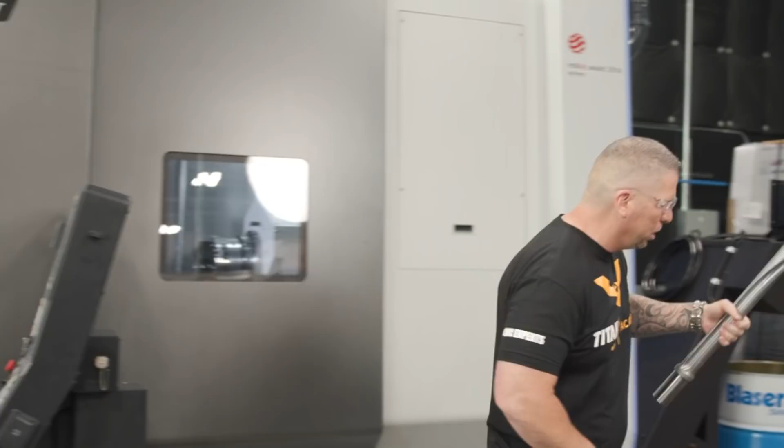And now we're on the big SMX 3100 doing some 5-axis work, cutting some fins into this amazing part. And what is that? Is that the TE? Yeah, Harvey 1 TE. Awesome. So that's a Harvey 1 TE going right through there, big cuts. You can see how it's changing angles. I mean, just the beauty of this machine right there, using all the axes just moving, getting after it, big cuts. Mm-hmm.

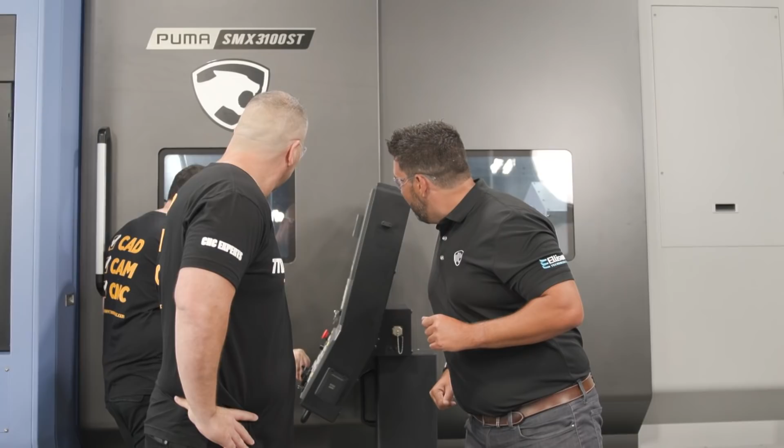So when we were talking earlier, we talked about the machine, we talked about the 9-axis and what it can do, but I think a lot of people wonder, why would I want to buy this machine? I could go buy a 3-axis mill, I could buy a 2-axis lathe for less money. Why would I buy this machine? And more drama. Nice, nice. Look at that cut. Love it. So why would we buy this machine?

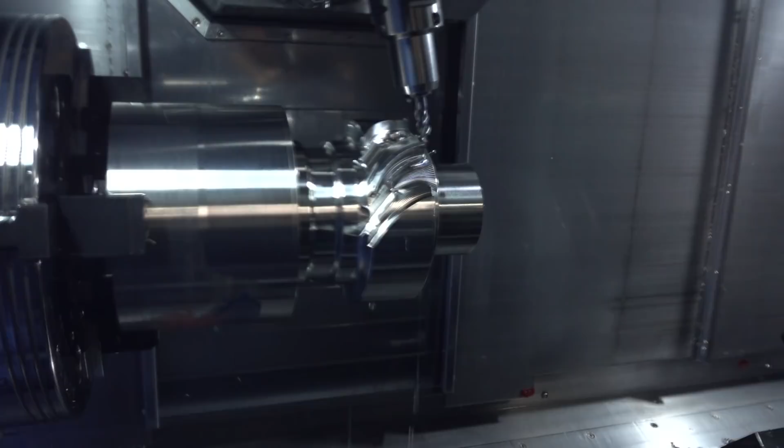And it all comes down, and you talked about it, to making more money. How can we become more efficient with our process? Yep. And right now, in the shops out there, your biggest asset is your labor. Yep. But also your biggest challenge, finding good guys, is also labor.

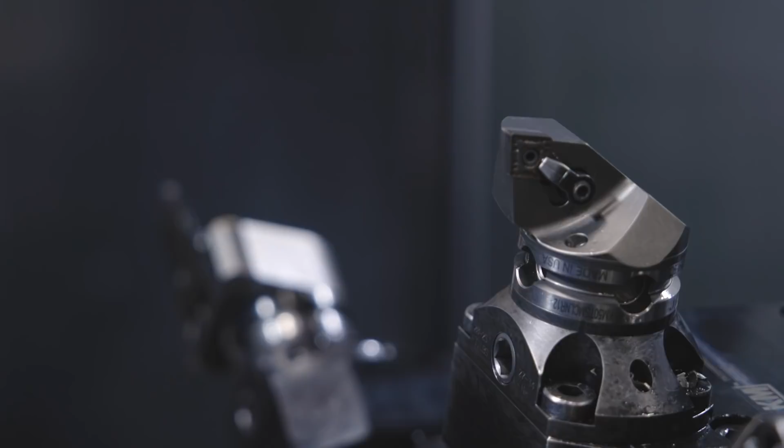So the good guys or girls that you have in the shop running the machines, you want them to maximize their time and be as efficient and productive and as value add as possible. By combining operations, you can remove all of that setup, all that non-value add, and put it all into the machine so that when your spindle's cutting, you're making money. Absolutely. And what do I mean by that?

So for example, if you've got a lathe and you're gonna make this part on the lathe, you've got to come in, you've got to turn it, we're gonna drill it. Maybe we use some live tools for it. But let's say you're a job shop and the next day you have a different part to make. And then you're like, oh man, I need another one of those angled live tool holders. Well, that's another 4 or 5 grand, 6 grand, whatever I'm gonna spend on that. And then you got another part and you need 2 more of those angled live tool holders. And then you run out of turret positions and you got to tear down your whole setup.

But a machine like this one, the multi-process, in that upper head, because you've got a tool changer, if you want to go from a 1/2 inch drill to a 3/8 drill to a 5/16, whatever you want to do, all you're doing is a tool change. Yep. Same thing with your turning tools as well.

You can keep our big monster tools, our big drills, dedicated down the bottom, but we could use that tool changer in combination with that true milling head, which is gonna allow you as a shop owner to basically save money, and you're gonna make more parts and make more money and become more efficient, and you're gonna be able to feed your families better and go on cool vacations and everything else that goes along with that.

Absolutely, man. And you ran a shop, you owned a shop, you know that challenge of setup, and every time you move a part from one machine to another, you may scrap it. But it all comes down to the parts. And that's why this platform is so well designed for job shop type environments where one day you get a PO for this part, next day you've got to change it over, you've got to make something else, you need to be up and running as quick as possible. That's where this type of platform is really going to take advantage.

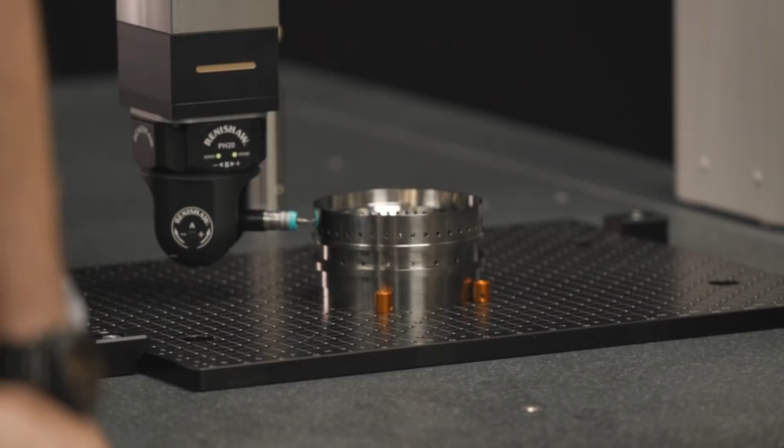And so exactly, it's like 7.5 degrees, 15 degrees, 22.5 degrees. That's right. Those are the degrees that you're locked into, and you can't check anything really efficiently if it's not on that angle. Correct? Yeah, exactly. Like we have 40 holes here at varying angles, 9-degree separation. With the old probe head, you couldn't get all those holes without running at least 2 or 3 times the program to get everything. So it helps us really be a more efficient programmer. Exactly. Right? Gotcha.

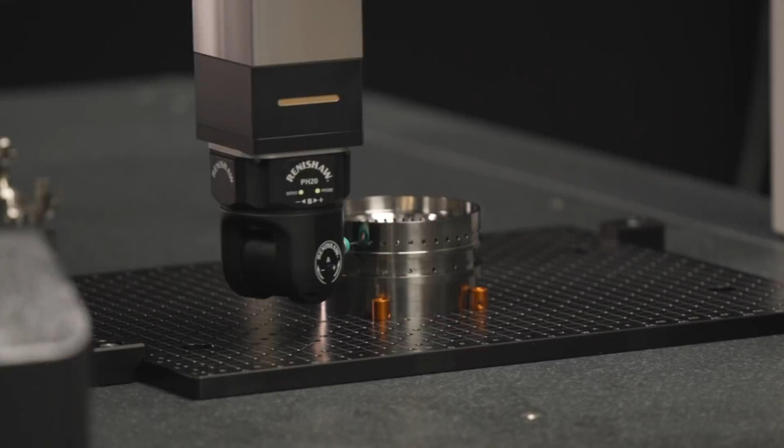So now one of the things with that, we have full 5-axis head movement, right? We got infinite angles, or less than a degree, approaching infinite, right? So what does that give us as a benefit with respect to this space right here that we're checking parts? That allows us to optimize the space of the CMM, getting around the part a lot more smoothly compared to the old CMM, where it comes out and then goes back in.

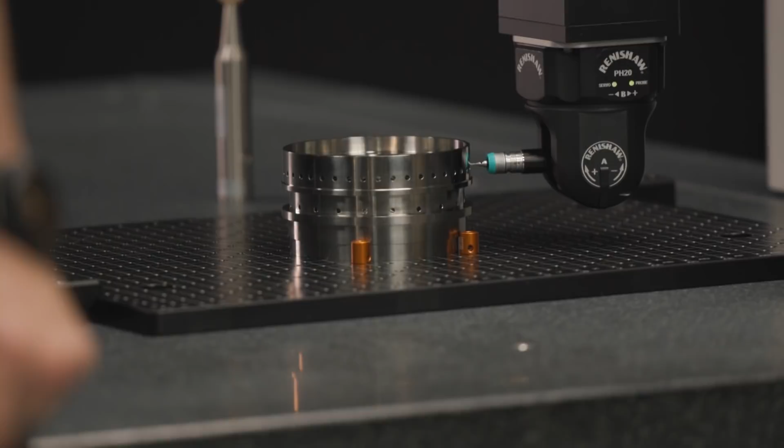Well, and one thing they were talking about there at the SMX that I like, they talk about not having to break down setups, right? Having the ability to kind of multitask. So with this, we might be able to maybe sneak another part in there, multiple setups. You see how long the space is on the CMM, so we're able to run another part in the back there, or maybe even side by side, giving enough space for the probe head. Oh, there's a nice little 5-axis move for the end.

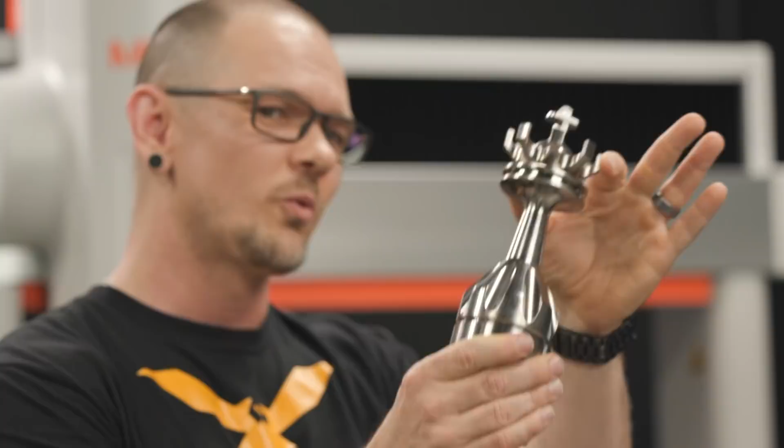All right, so we have one more part to show off the dance moves of our head here, right? That's right. Okay. Some of you guys might recognize this part right here. This is our Titanium King XL. And actually, if you go to the Academy, we have a video with Tyson showing you guys how to machine this part right here. Now, we're gonna do a little inspection on it. That's right. Thank you very much, sir.

All right. And right now it's just switching probe tips so that it allows for a longer stylus to get into some of these tricky angles here. Yeah, and I like that. I don't know if you guys can see, but we have a 6-station probe change rack right here. It has six different modules there. We have a standard force, medium force, an EM1 and EM2, a light force, and a 6-way. So definitely a lot of options to tackle the different nuances that you might run into in an inspection environment. Very nice. So you ready? Yes, we're ready, let's do it. Let's go.

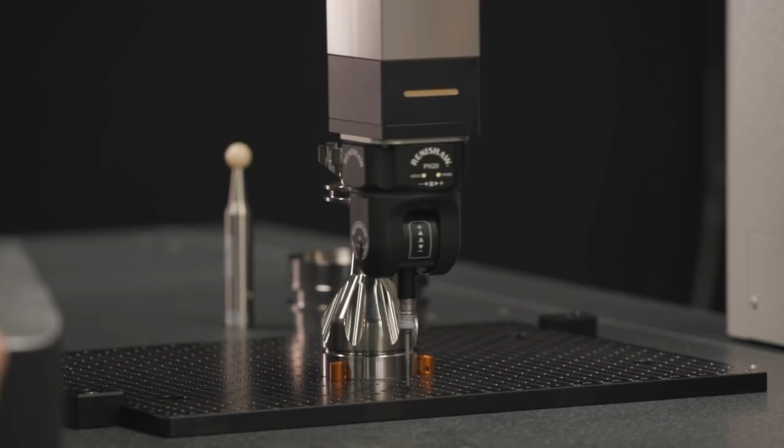All right, I've seen that several times, and it still gives me a little bit of a heart attack seeing it rush towards that probe rack. So we have rapid speed on this, roughly? Yes, roughly about 600 millimeters. Gotcha. And so again, another little alignment. Little nice rotation right here.

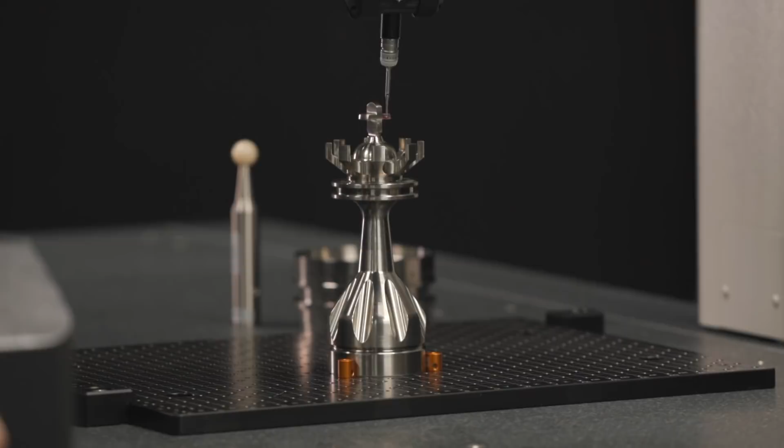Now this is what I kind of like about this. We're not really using the machine movement, we're using head touch, right? You want to tell us a little bit about that? Yeah, the head touch allows it to just move the probe head without moving the big machine, all of the mass of it at least. And that allows for a faster inspection time, a faster calibration time. Basically, we don't have to brake, we don't have to accelerate this big machine, we don't have to slow down this big machine. And you can see that with the moves going around very close to the part, optimizing the movements and also optimizing the program timing too.

So we talk about optimizing the programming time. If we're good programmers, looking at you guys, what kind of savings can we expect to see? You can look at about 40 to 65%. 65%. No excuses. No excuses.

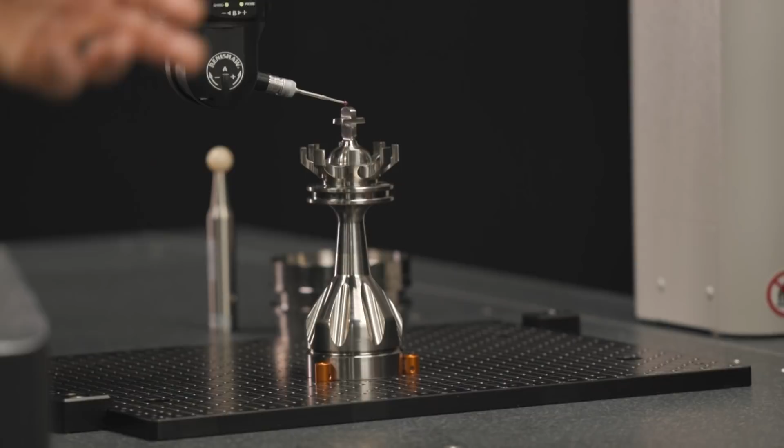All right, so here we go. Looks like we're checking the cone. That's right. I love that motion, I really do. So then we got the head touch coming around the top again. So let's see what else. Accuracy and repeatability, right?

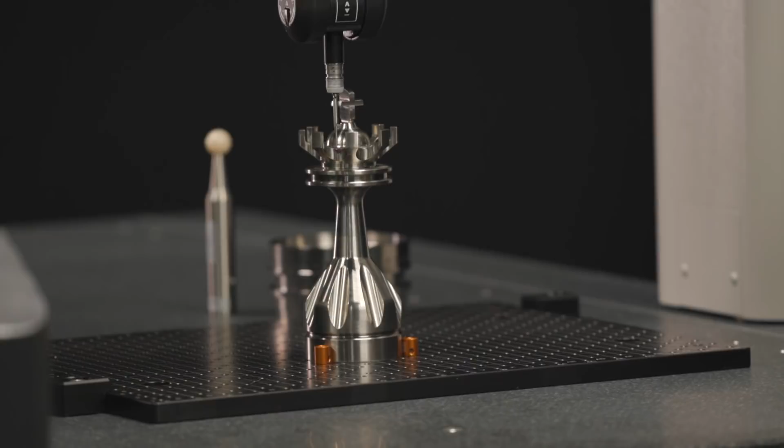It's nice to be efficient, but if we're not accurate, what are we really doing? So what are we talking about? Accuracy, repeatability. You're looking at about 2.2 microns on there, about 1/10 of a thou for you inch guys. I'm one too. And when you increase the length, of course, you lose a little bit of accuracy, but we're still looking at about under 3 microns here. Okay, very nice. I love that.

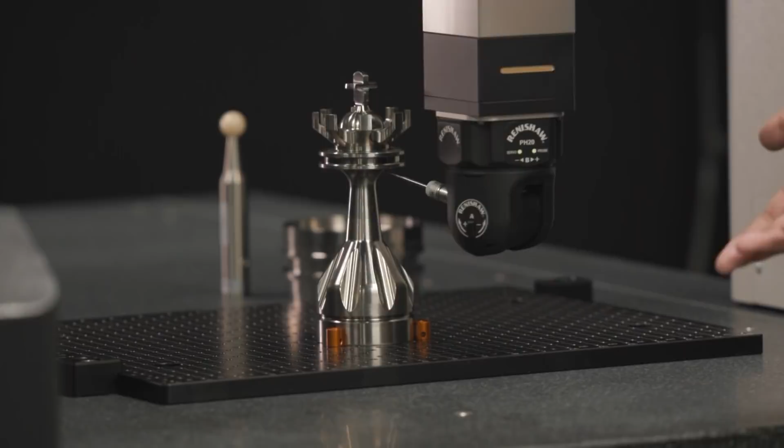Yeah, it does that whole rotation. That's that A-axis tilt that you were talking about, right? Yep, coming underneath. And the max on this, instead of the other probe head, is 115 degrees. And you're able to get nice movements like that. Nice little bow at the end, right there. So that wraps up our small demonstration of the Crysta-Apex.

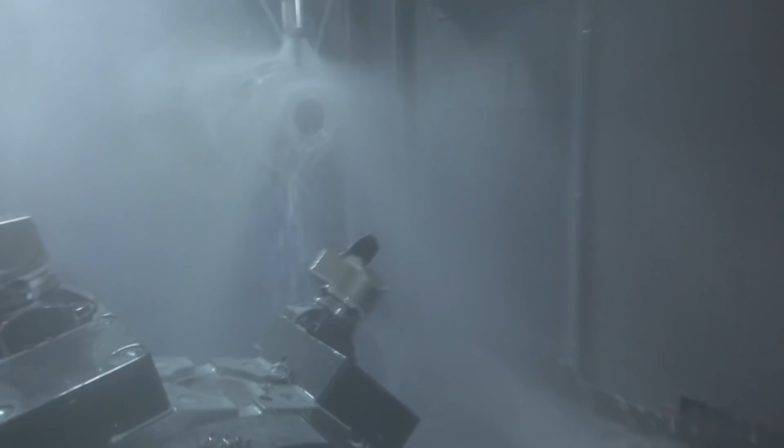At this time, I want to bring in Dylan, and he is from Mastercam. You guys know Dylan from the last Boombastic. Hey, what's going on, brother? Good to be back. How are you? Good, thanks. Awesome, awesome.

So we got everybody out here, and let's just have a talk a little bit about toolpaths. You can have all the material, you can have the CAD, but it's all about the CAM and programming those toolpaths so you can actually take advantage of a 9-axis machine. And Mastercam, you guys got some trick toolpaths. Yeah, obviously we got a complex machine here. We got a complex part.

We got intimidating tooling. I don't know where that drill went, but it's being passed around like it was Excalibur here. So how are we gonna program all that easily, efficiently, and safely? That's going to be done in the Mastercam Mill-Turn module. That's what we're going to use for these kinds of multitasking machines to lay out our programs in an easy and efficient manner. So that combines a lot of different parts into one module to enable things like that.

We've got a lot of specialized tool paths for something like a mill turn machine. And then combined with that, we've got the complexity of the machine where we've got different streams. We've got a lower turret, we've got an upper head. They're all moving around simultaneously. If you're doing something like actually bar feeding, you've got the lower turret working on one half, maybe the sub, you've got the upper head working on the other side.

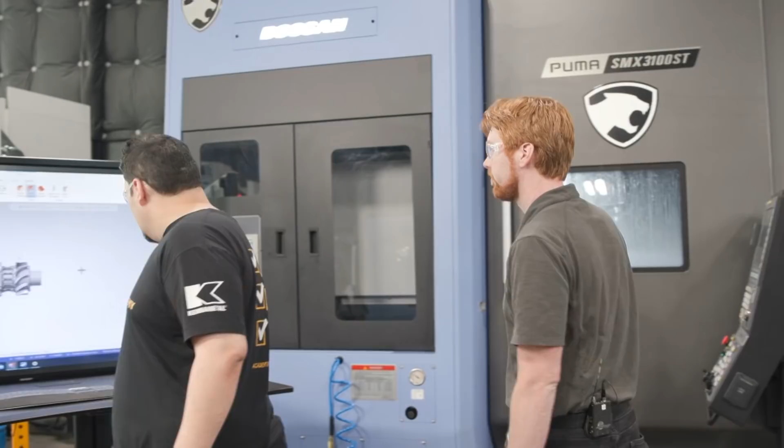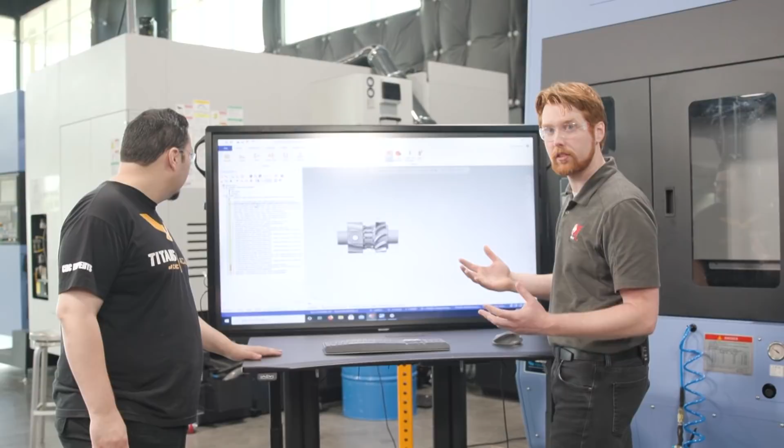So we start this off pretty simple with the lathe face and the lathe drill, but then right away we get into some of the more complex stuff that's only in this mill turn module. So we're starting off with a pinch turn path, pinch turn main and pinch turn associated here in this case, to remove the bulk of this material off of the part in the turning operations before we get into milling.

So what is pinch turning? That's when we're coming in simultaneously with a turning tool in the lower turret and a turning tool in the upper head and pinching the part and taking material off on both sides at once. And there's two main reasons to do that. The first reason you might do that is if you had, say, a long, skinny part and you were trying to take an aggressive cut with a single tool, you might get deflection in that part or in that stock.

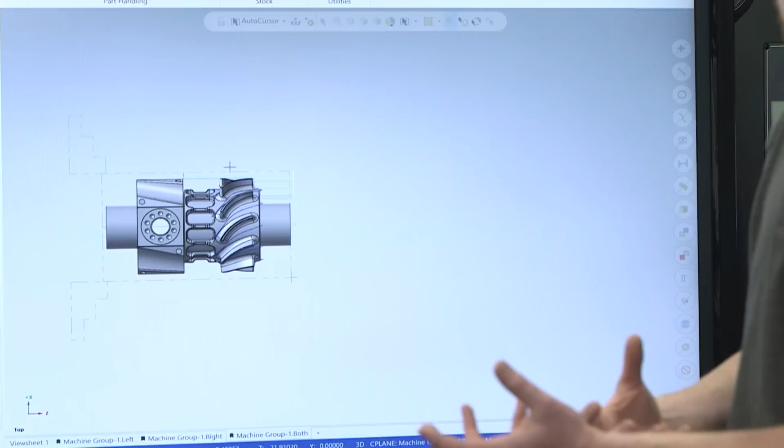And with pinch turning, you're equalizing those forces. You're coming in from both sides, and you can actually take a heavier cut and not worry about that deflection. Now, obviously, that's not a problem with this part here. We've got a lot of stock here. That's not going to deflect. So that's where we come to the second reason to use it, is we're doing twice as much turning in the same amount of cycle time. So really awesome path there.

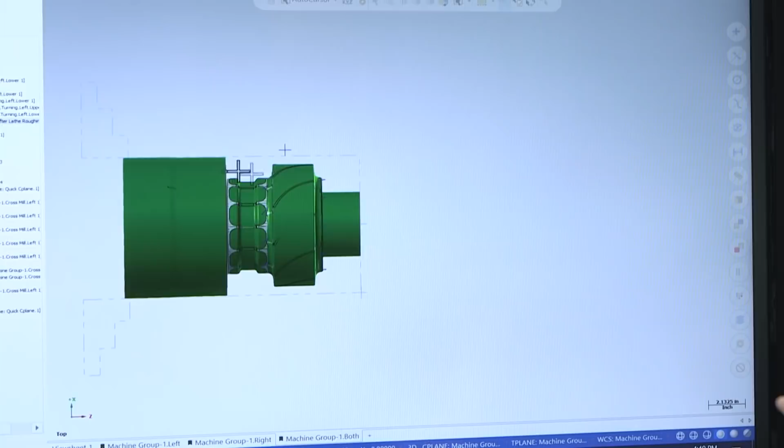And then that pretty much finishes up our turning on this part, and we can go right into milling. This is a pretty milling heavy part. So this is what we had left from the lathe paths. We had some grooving there in the center, and then we had our pinch turning that took the bulk of the material off the front side, and we're going to jump right into the multi-axis head stuff. And that was really easy to make.

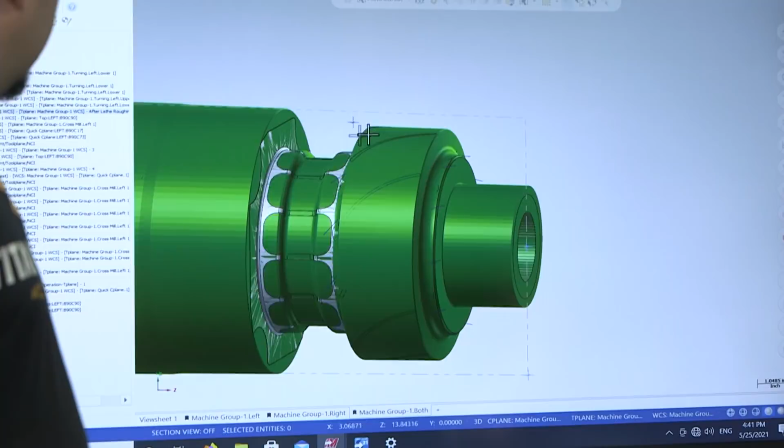I was able to just click on the stock model operation, and I told it just calculate the material after all of the lathe operations and generated that. Yeah, and so we get a visual right on the screen here. The green is what's left with stock, and we can directly utilize this in the following multi-axis paths to cut down on airtime and zero in on just what we want to cut in between these blades.

I actually was using, after the milling operations, I'd actually generate the stock model just so I could get a good visual of how the part would look after. Yeah, and that's an excellent way to utilize these kinds of stock models.

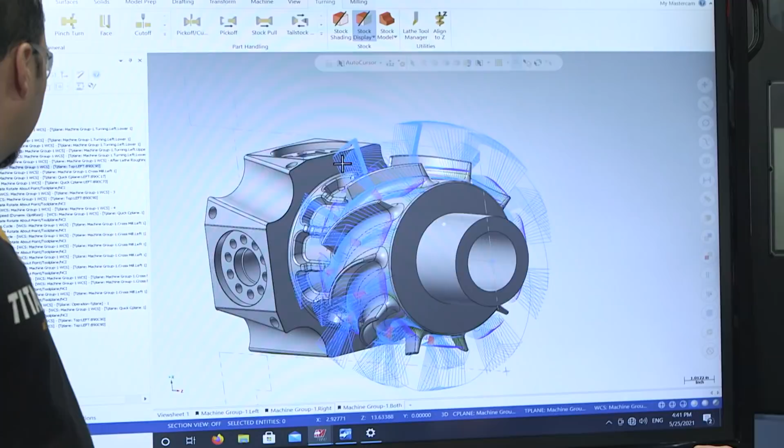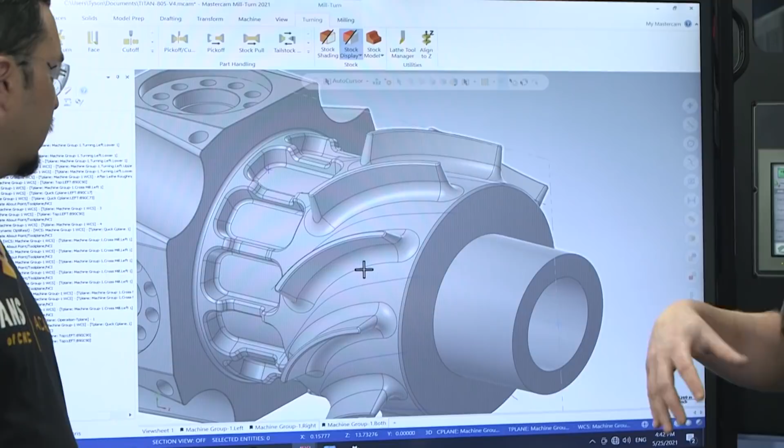So the first path we've got here is another kind of specialized path. It's a Blade Expert path. And that is doing the bulk of our roughing around these 10 airfoil blades that are on this front diameter of this part. And if we look at this geometry, before we even open up this path, this is pretty complex. We've got a radiused floor, we've got these airfoil shapes, and that might wrap around and cause issues for just 3-axis roughing. If we were doing 3+2 positional, we couldn't get all that material out with a single positional path. We've got large floor fillets here.

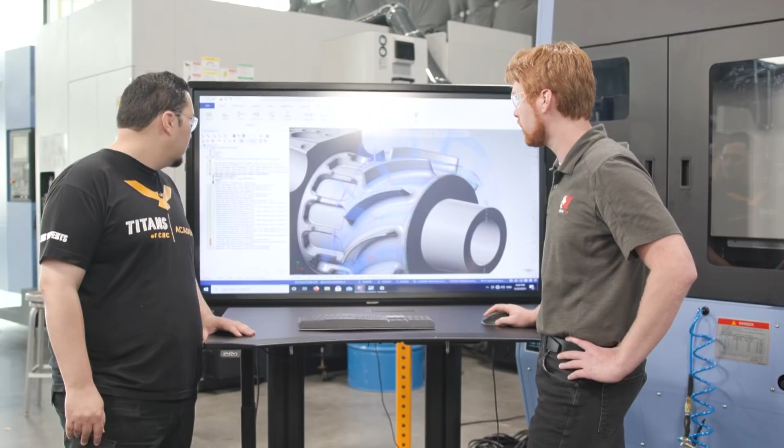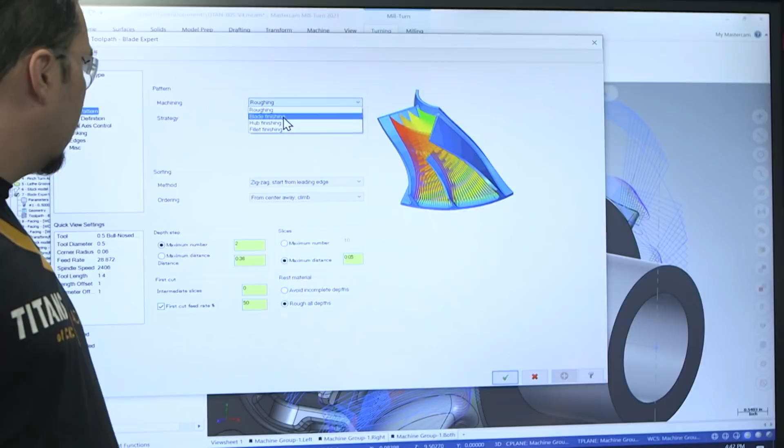So Blade Expert is a path that is kind of specialized to automate some of the programming for these airfoil shapes. If we walk through the setup of a Blade Expert path here, we're feeding it the stock, which is after our lathe operations. And then in cut pattern, we've got just a few choices here. There's not much that we have to fool with on this page. We could rough, we could finish the blade, the hub, or the fillet. So this is really targeting these blades on a hub shapes, impeller shapes, anything with repeating airfoils patterned around a part.

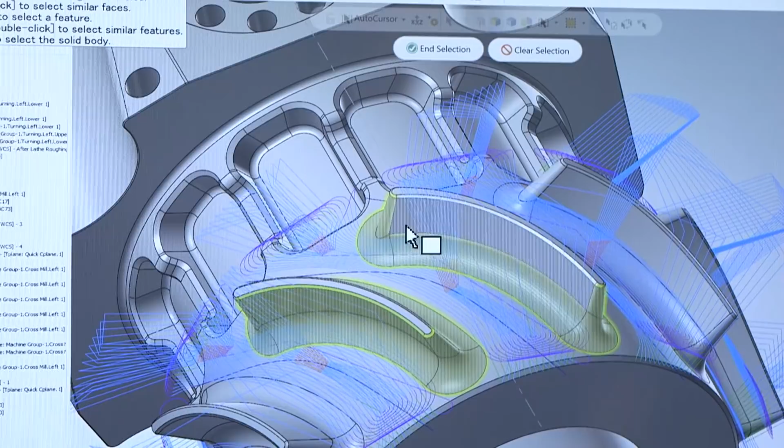And then our part definition here, super simple. It's just a single hub floor. And then we're defining the blades, splitters, fillets here, which is just 16 surfaces. We're giving it 2 blades so it understands the gap in between them. And then we're patterning the rest of the part around. We have 10 segments here. Really simplified part definition, tool axis control, and this is kind of an automated method of generation.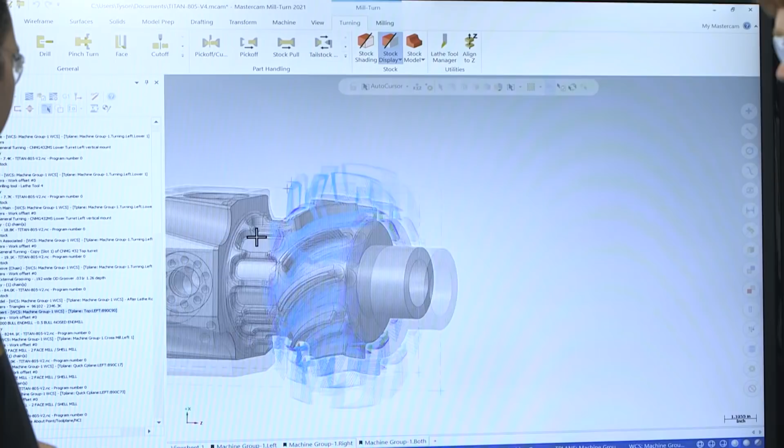So what that gives us, and I've just dirtied up the path so we can't see. Let's reopen this part. So let's jump back into that part because I want to see the actual Blade Expert path here. Again, we're going for automation here. So this Blade Expert path is literally like 2-3 minutes to set up. And the inputs are very basic. And what you get out of that is a whole lot of roughing to do this entire part.

Now, if we wanted a little more efficiency, we could go into a multi-axis pocketing path and do more dynamic style motion, so constant cutter engagement. Here we're going really aggressive with this Blade Expert. We're full slotting and we're doing this all in 2 depth cuts, the entire thing. So to showcase the other side of this, if we wanted more efficiency, a little more programming time, we can jump down to a multi-axis pocketing path here. And we've targeted a single blade to rest rough.

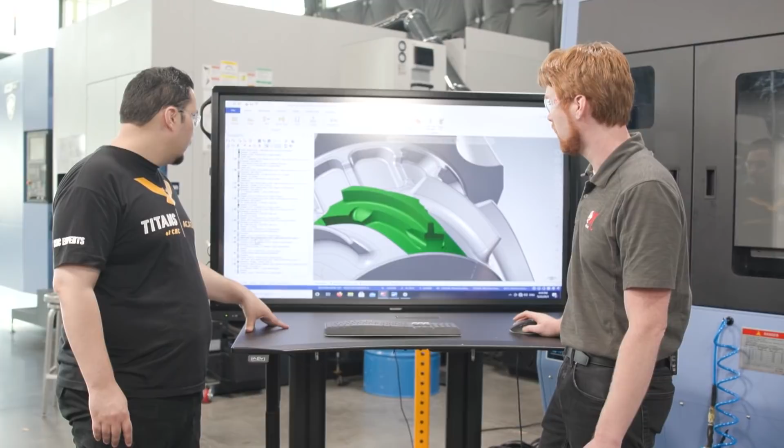And what we're doing is we're actually rest roughing against, we made this little pie slice stock model so we could kind of zero in on this programming here. And now we've got more dynamic style motion where we're efficiently engaging and coming off that material in a very controlled manner for the rest roughing, again with this 1/2-inch ball end mill. So this is a little more setup, but it gets us benefits in terms of tool motion. If we were to try to do this over the entire hub, it'd be a lot more work than the Blade Expert. So this is the kind of trade-off that you have the choice for.

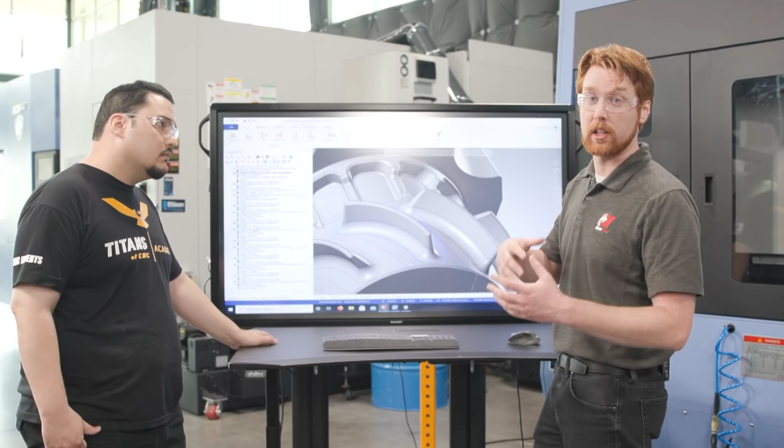I think one of the cool things I also want to go over here is for those of you that are looking at this and you've been using Mastercam Lathe and you're wondering what mill turn's all about, you're probably wondering how do you set up the planes for this, right? This is a lot of 3+2 and multi-axis work. That seems like a lot of work to manage these planes, and mill turn has some special tools for that.

So for most of this, we're actually deriving the planes to use for machining off of the geometry we've selected. So Mill-Turn is automatically creating those planes for us in the background and aligning the machine correctly to the work plane so we don't have to worry about that.

If we look in the planes manager, a lot of these are just auto-created planes that occurred as soon as we generated the actual toolpath with the setup in the toolpath parameters. So if we look at this OptiRough and we look at the setup here, we've got some basic checkboxes in terms of align with machine, maintain spindle origin, to let that toolpath know how it should generate.

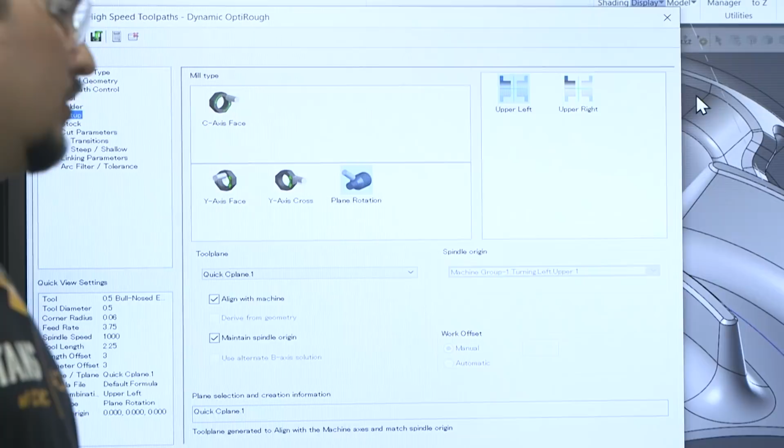Then there's also things like I have an angled drill in this part where I just generated the tool plane just by clicking on derived from geometry, and it angles the drill properly based on the hole that's on the part. Yeah, so we have this hole here that's actually breaking out into an angled face. So we couldn't even easily make a plane on that face to set it up, but because we're picking the hole as geometry, we already know the plane, and Mill-Turn is going to take that and create it in the background so you don't have to worry about it.

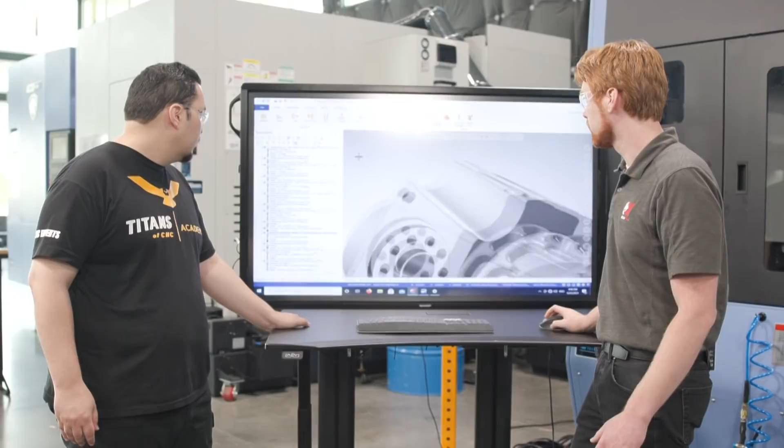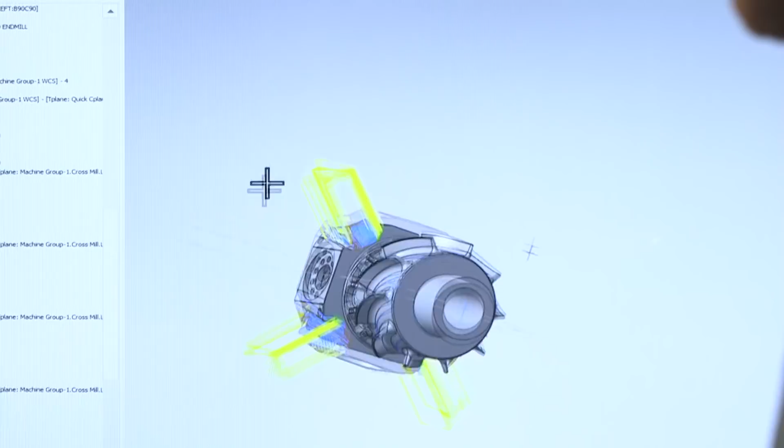And then one of the things I really like about Mastercam, just Mastercam in general, working on this part, I was able to basically split it off into sections. So I'd program just one face or one pocket, and then I'd use the transform toolpath function to tell it how many times around the part to take that feature, and basically it'll copy that program and rotate it so that I can do it on multiple sides of the part. So basically I only have to program one little section, and then Mastercam does the rest of the work.

So as long as my part's symmetrical all the way around. Yeah, we've got an easy workload here because everything's actually patterned around this part. But again, if this weren't, we could go in and create those operations and let Mill-Turn figure out the planes for us for the most part.

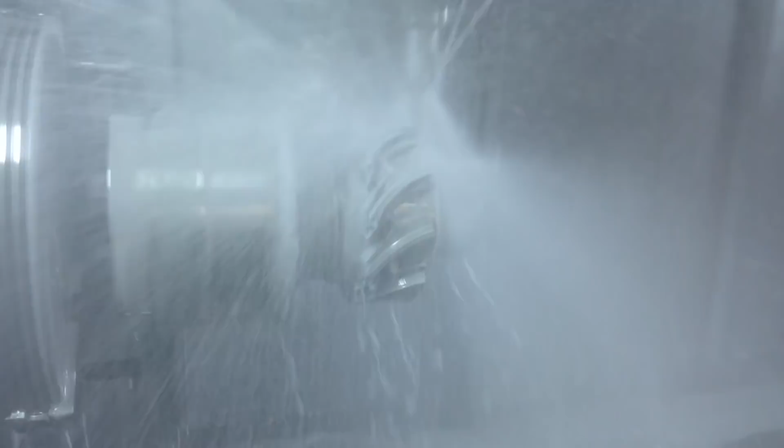So on this part, we've got it easy in terms of we get done with the turning and then we go right into the milling, so we don't have a lot to deal with simultaneous upper stream, lower stream choices, but we always have the ability to sync that within Sync Manager and basically manage how all these pieces are moving together in the background.

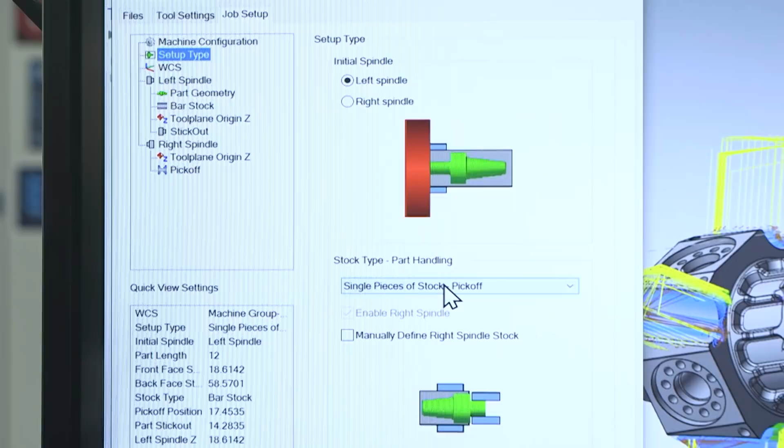Now this part, it's a single part, single piece of stock, so when we actually set up this job, that's what we're telling Mill-Turn is our setup here. We've got a single piece of stock that we're going to pick off at one point and bring to the sub. And the choices here, we could actually select continuous bar stock with an actual cutoff operation and then a pull or a feed, two separate parts in the main and the sub. And what this is going to do is automate our programming down the line and figure that all out for us.

If we did have multiple streams moving at once, we've got all sorts of different options to handle this at the toolpath level in terms of turret parks and turret moves, and then also at the syncing level when we actually post this code and we have to sync up the operations. So Tyson, I don't know if you wanted to actually post a little bit of this and then show us how you would sync your operations.

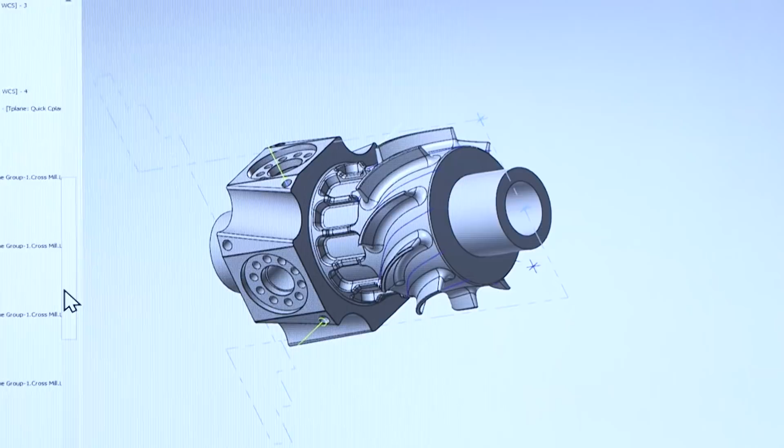Let me... So what we're doing here when we're posting code is we're actually going to post some intermediate code and then go into Sync Manager. And this is where we're going to manage our machine syncs and determine where we line up those upper and lower streams in this machine.

And then after that, we've determined exactly what our program is going to be top to bottom, and we can launch into the full-blown machine simulation and check that the changes we made to the syncs will still clear on all these components on the machine itself.

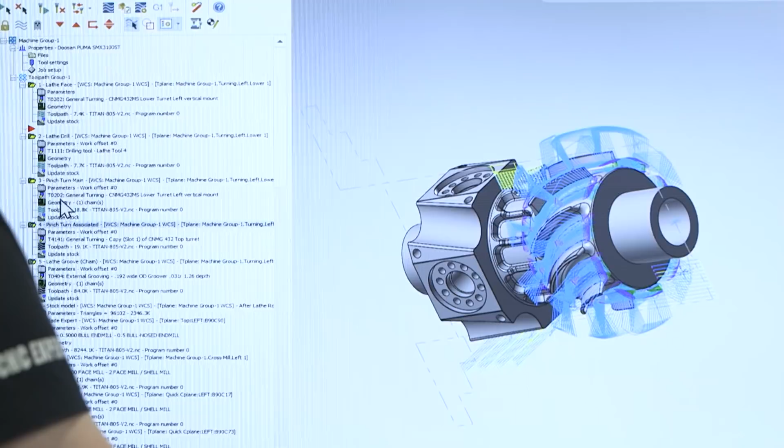And in this case, we have a fully modeled machine, we have fully modeled holders, everything is in here, so we can, with confidence, go from machine simulation to cycle start on the machine. And that's been a really big help with the multi-axis machine, being able to model the holders and double check my clearances, because with the two streams of code that I have to run, there's a lot of clearances and things I need to watch out for.

Specifically with some of the B-axis head motion in this, I see the B-axis really leaning over, and the clearances to chuck jaws and other machine components get pretty tight. So to be able to see that in machine simulation first is super important to make sure I'm not going to hit a jaw or anything when I'm doing this multi-axis motion. So I have a few of the operations posted here.

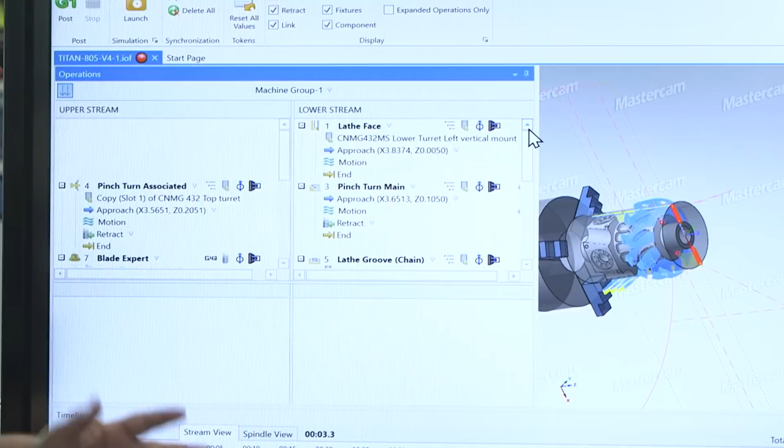And then, as Dylan mentioned, syncing them, I can time the upper stream to the lower stream so it only runs when it reaches a certain point. So for this one, I can say after it faces, we'll start the pinch turning operation. And then after the pinch turning operation, I'll drag it to the start of the grooving operation. And then after the grooving operation is done, we'll drag it to the start of the blade expert operation. And then that's pretty much where all my milling starts after that. So sync-wise, this is pretty simple.

And if this were any more complex, we could also save these syncs so they're associated with those operations. We only do this once when we post all these operations, and then those states are saved. So when we go to post this again, if we make changes, those syncs still remain. We also have a lot of options we can toggle with each individual operation at this stage in terms of plane rotation, G-codes, and such in the background.

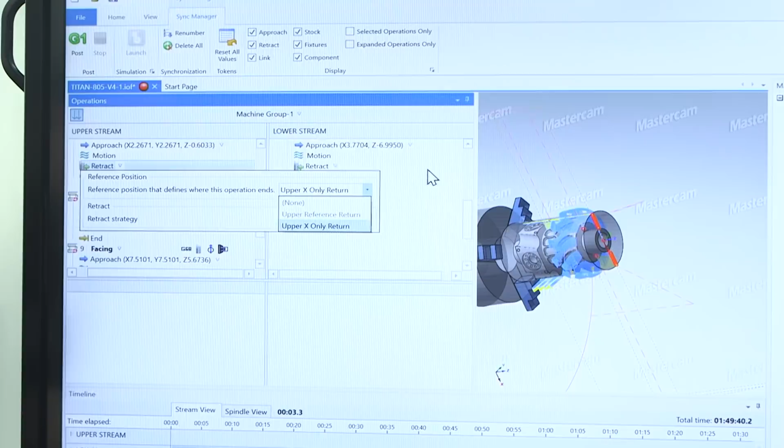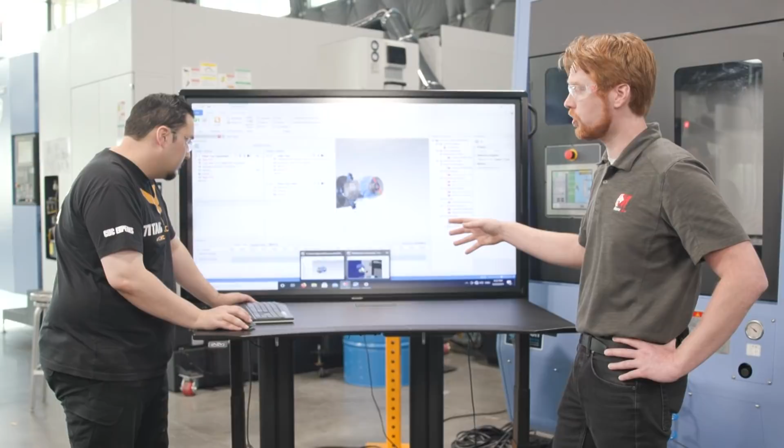Coolant controls, G-codes, things involving the B-axis, and then you also have your retracts here, so we can tell it to go home after the tool or only home in X if for some reason we have clearance issues. So this is where we have really granular control of the machine motion and the toolpath functionality if we need it in these drop downs, but otherwise we can leave that alone and continue on.

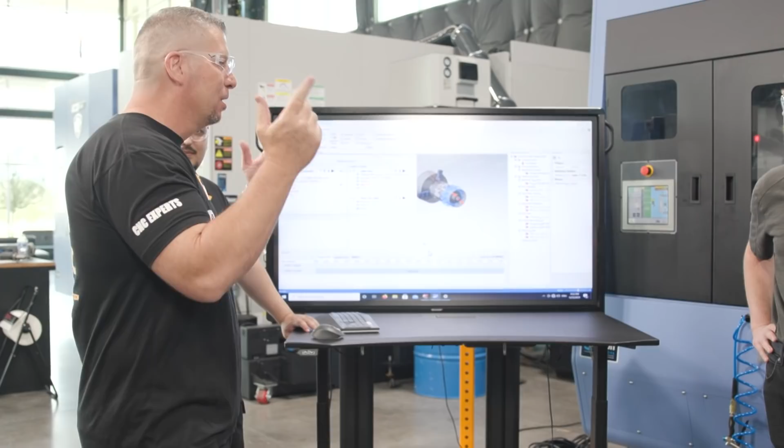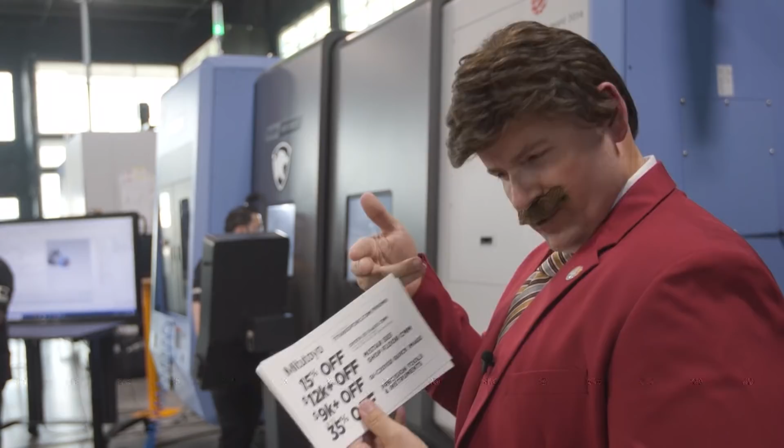And as I stated before, we actually put the high pressure coolant to get all the chips out of there. So you can't see much, but we're gonna take this entire video later and put it out on YouTube. We're gonna show the entire process, all the depths of cut, the axial, the radial. We're gonna show you everything, speed, surface foot, all of it, and show you the finished part, all the finishing, everything.

And I'm excited because tomorrow we have an amazing demonstration also. My man Stuart, he's on the DVF 5000 doing some crazy roughing and crazy finishing on the Titan 40M project. It's an awesome part, with a lot of tricky geometry. So he's gonna come in, do some different ports on the outside, do some full simultaneous milling, and he's gonna do it fast and efficient. It's gonna be awesome, all right?

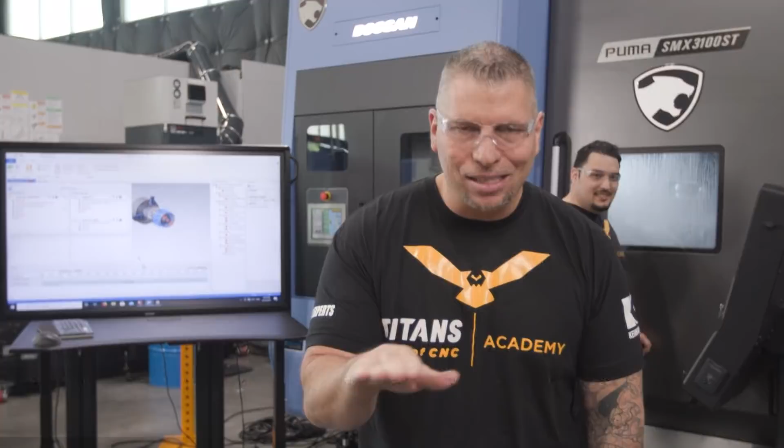Boom. We are helping you make money, compete in this industry, bringing free education, bringing entertainment, and Mr. Dave Burgundy is helping you spend less of that money so you can go on vacation and buy houses and make it happen. And boom, my son Tyson.

Tyson. What's up? What's up, man? So, Tice, crazy part. Yep. Long day, right? 2 episodes. We have 4 more episodes to go tomorrow, Wednesday, and Thursday, 2 episodes per day. But he gets to just chill and finish off this part. We're gonna run it on camera. We're gonna show it on YouTube. It's gonna be great, and proud of you, man.

Oh, thank you. A lot of you guys know Tyson. You know, at the beginning, didn't want to work at the shop. No. But now I'm running 5-axis parts. 5-axis parts, 14 years in, teaching the trade to all the people out there. If you guys want to learn lathe, you want to learn the rocket, Tyson is the teacher on that. And there's kids all over the world, machinists all over the world that love this guy. I love this guy, nicest guy ever. And really proud of you today. Thanks. You killed it, man.